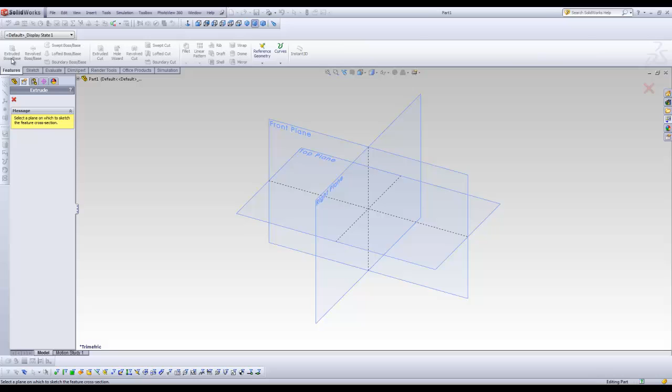We're going to start off in the extruded boss/base, and then click the front plane. This brought us into our sketch menu, where we have many entity tools such as lines, circles, arcs, and rectangles. We then have entity manipulation tools over here.

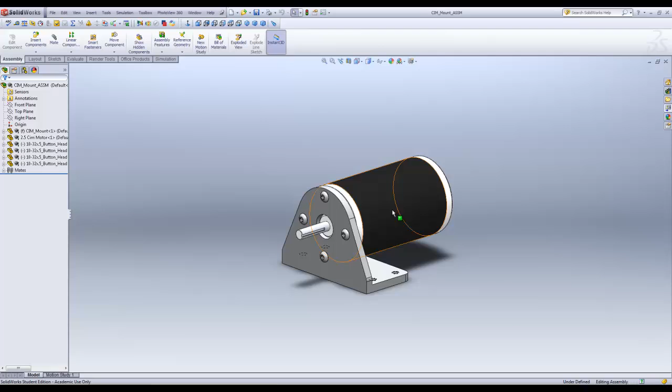We want to start off by creating the face that interacts with the motor. This feature right here is what we're going to start off with. It has a straight line that curves around the motor and then goes back to another straight line. We will then create the center hole and then the 4 motor mounting holes.

To start off, we want to create the profile of our motor. To do this, let's create a circle: click on the origin, bring your cursor back, and then click again.

We want to hit for construction. What this does is it does not include this entity in the final extrude, but we can still use it for reference. It turned it from a solid to a dashed line. Any entities with dashed lines are reference geometry.

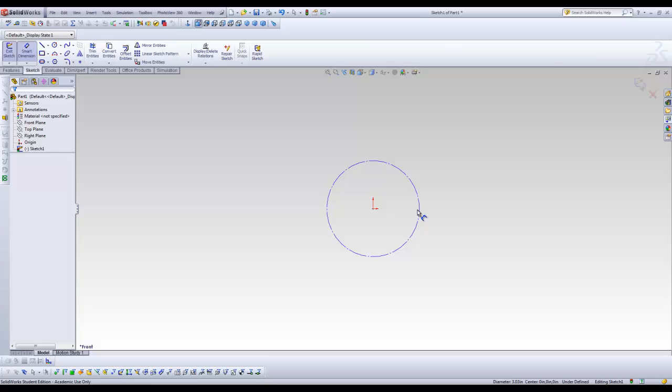We need to scale this so that it fits the profile of our motor now. We can go to our CIM datasheet and see that the maximum diameter is 2.536 inches. So now we want to hit Smart Dimension, click on the motor, click again, and hit 2.536. This created the profile of our motor, and this is what we're going to work around.

Now we want to start off with a line. Create a horizontal line underneath the motor. This will act as the base.

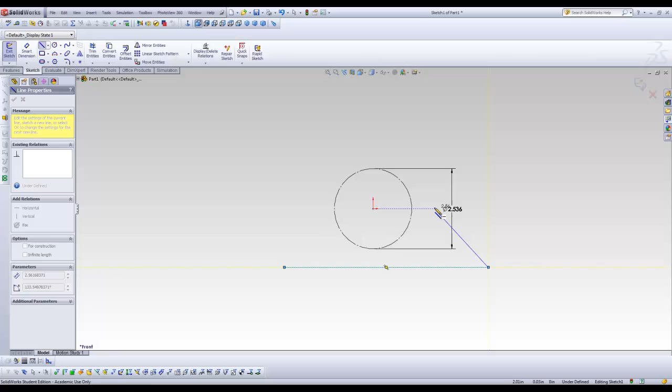We then want to bring our cursor up and make an angled line towards the motor. Notice how it wants us to create another line so we can complete the polygon. However, we do not want to do this right now. So we're going to hit Escape, then click the line again, and we're going to click this endpoint and do the same thing.

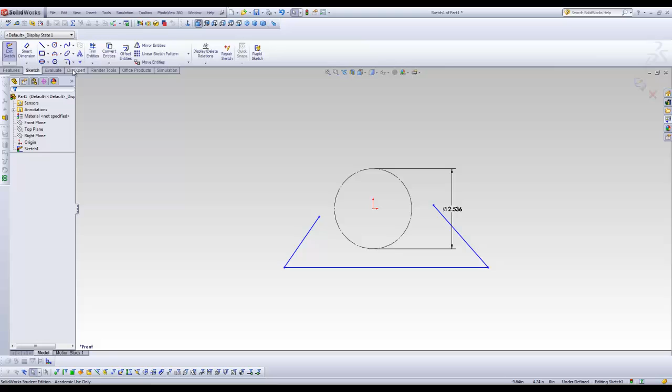Now we want to create that arc that goes around the motor. So we're going to go up to our arc tool and hit 3-point arc. I'm going to click this endpoint, then this endpoint, then click above the motor somewhere.

Now we want this arc to follow the contour of the motor. So what we're going to do is click the arc, then click the motor, and hit co-radial. What this does is it not only creates a concentric constraint, but it also makes it the same radius as the circle, so it follows the contours perfectly.

So we want to click on the arc, then click on the line, and hit tangent. What this does is it makes the line tangent to the arc, so it seamlessly flows into it. We want to replicate this on the other side.

Now what we want to do is create that profile where it goes from an angled line and then transitions into a straight vertical line. So we want to go to the line tool, click on the angled line, and then bring it straight down to the horizontal line. Hit Escape, go back to the line tool, and do the same thing.

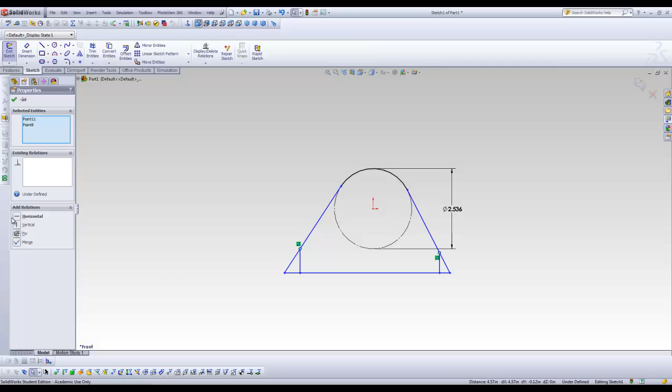Now what we want to do is select the 2 top endpoints and hit horizontal. This will create 2 lines that are perfectly the same size no matter where you drag them.

To get rid of this extra material, we can't simply just click on the line and hit delete because it will delete the whole line. We have to use another tool in SolidWorks called Trim Entities. We want to select the line, and it will just get rid of the part in between the 2 endpoints.

Now what we want to do is make it completely symmetrical to the origin. To do that, we need to right click, hit select midpoint, then hold shift and select the origin, and hit vertical. This makes it completely symmetrical.

Now we just need to refine it with some dimensions. So we're going to click Smart Dimension, click a horizontal line, and hit 4.

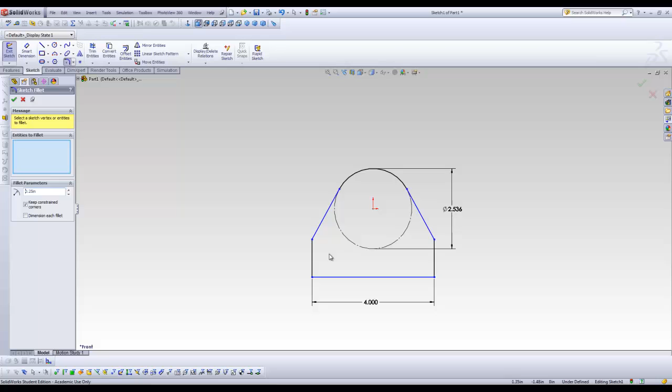Now what we want to do is create a seamless transition from the angled line to the vertical line. We're going to use a sketch fillet for that. We want to set the radius to 0.25. This will create a curve in between the two entities so that it seamlessly flows from one to the other, like so.

Go back to Smart Dimension and dimension the remaining line segment to be 0.408.

Now we want to adjust the overall height of the part. To do that, we need some more sketch geometry. So we're going to click the line tool and go from the top of the arc down to the bottom, and then hit escape, select the line, and hit for construction.

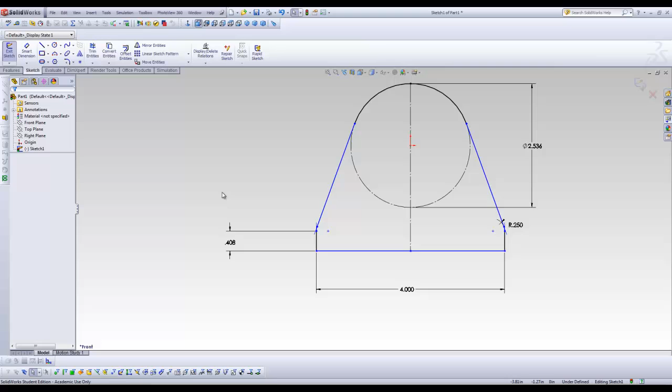Now what we want to do is go back to Smart Dimension and then dimension that line so that it is 3 inches.

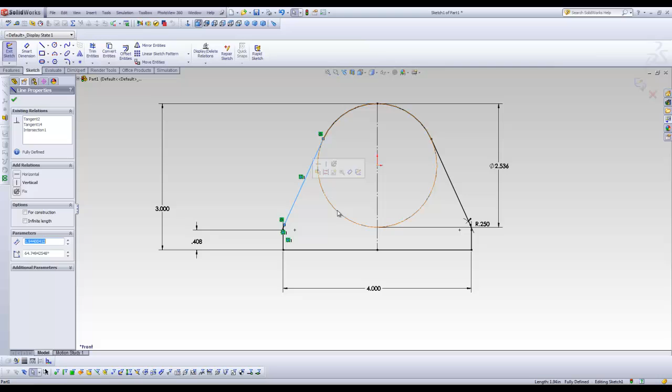As you noticed, all of the lines turned black. This means that the entire sketch is completely defined. Down here, you can see that it is fully defined. What this means is that no matter if you drag any element, it will not move. Everything has a dimension, everything is set in place.

So now we need to exit the sketch, and it'll ask us how deep we want to extrude it. We're going to go with 0.25 inches. Hit OK. Now we have a three-dimensional component.

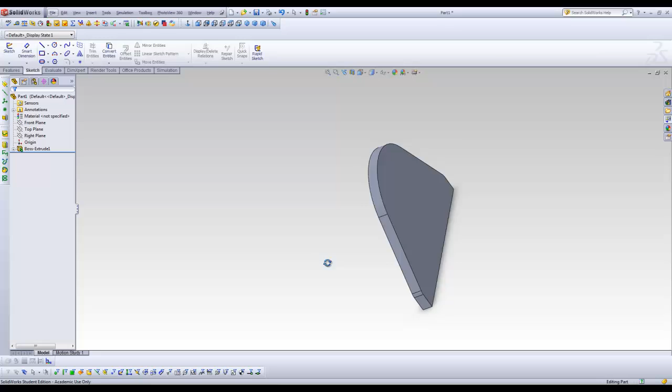To manipulate it in SolidWorks, you can hold down the middle mouse button and drag, and it will rotate around. To pan, simply do the same thing but hold Control. To zoom in, you can scroll in and out with the middle mouse wheel.

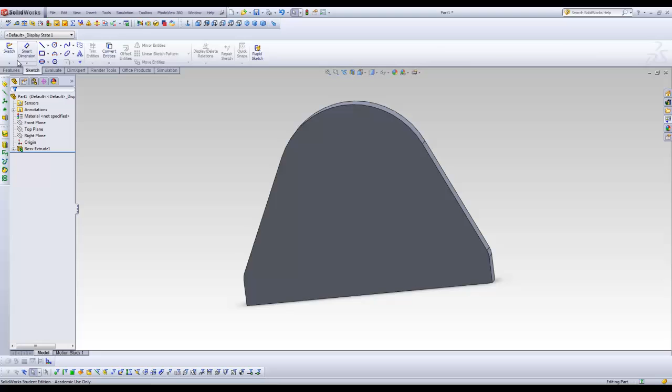Okay, now we need to create that hole in the center of our part, which allows the motor shaft through. So we want to go back to Features and hit Extruded Cut. This is the same thing as a boss extrude, except instead of adding material, we're taking material away.

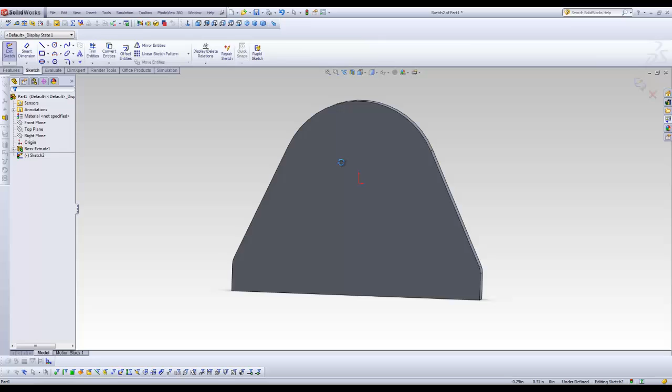Now it's asking us what plane or surface we want to do the sketch on. We want to select this surface. Instead of trying to manipulate this manually to line up our sketch, we can hit this button, the Normal To button, and it will make our camera perfectly perpendicular to the sketch. If you don't have this menu, you can right click and hit Standard Views.

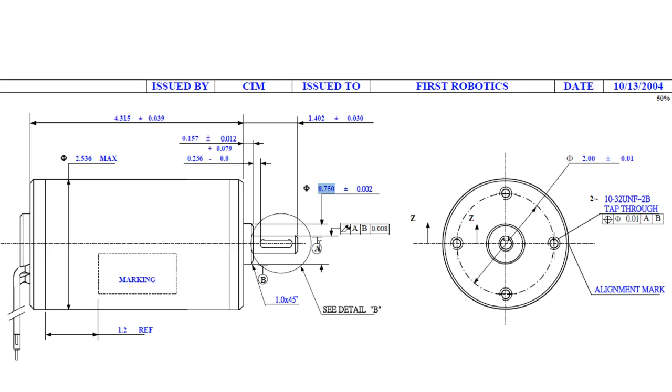Now all we need to do is do a circle around the origin. Going back to our CIM data sheet, we can see that the overall dimensions for that boss is 3/4 of an inch. So we're going to make our circle 0.8 inches in diameter.

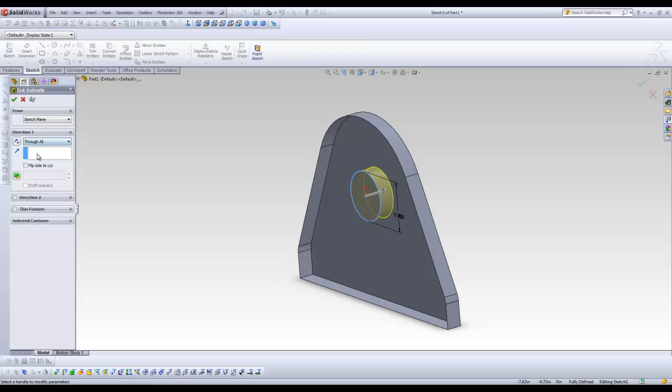Now all we have to do is exit the sketch, and just like the boss extrude, it'll ask us how deep we want to cut. Because we want it to go all the way through, we want to switch this from blind to through all, and hit OK. Now we have our center hole.

To create the motor mounting screws, we want to go back to Features and use another tool in SolidWorks called Hole Wizard. Hole Wizard is a nifty tool that has data for many different types of holes, taps, even metric and ANSI inch. So we want to go to Hole and select Screw Clearances.

Because our CIM motor uses 10-32 screws, we want to make a screw clearance hole for number 10 screws with a normal fit. We want them to go all the way through, so we're going to switch the end condition from blind to through all.

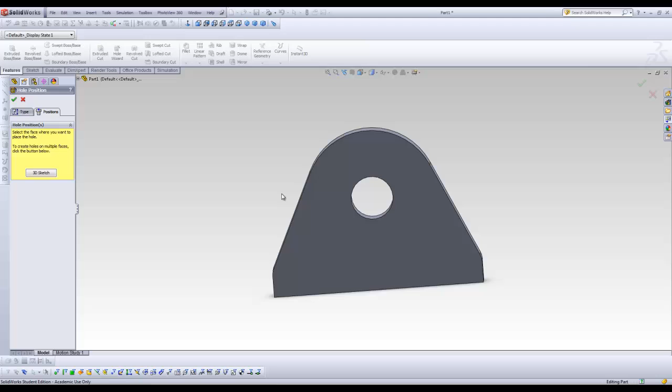When we click the Positions tab, it'll ask us which face we want to make our sketch on. So we want to select that face and hit Normal To. As you can see, it added a point, and the yellow circle around it is a preview of what the hole is going to look like.

Because our mounting holes are in a radial pattern around the center of the motor, we can simply make a circle and then position our holes around that. So let's make a circle around the origin, make it for construction, and give it a dimension of 2 inches.

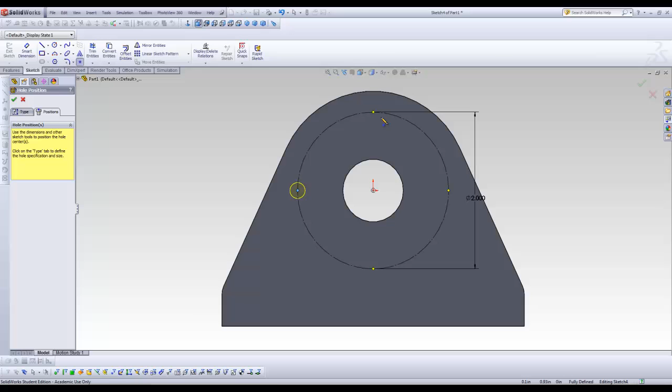I'm going to delete this point so we can add a new one in the correct spot. We're going to select our point tool, go onto the circle, and select the point directly to the left of the origin. We're going to do that all the way around. Now we have our 4 holes. We're going to hit OK. And now we have our center hole as well as 4 mounting holes.

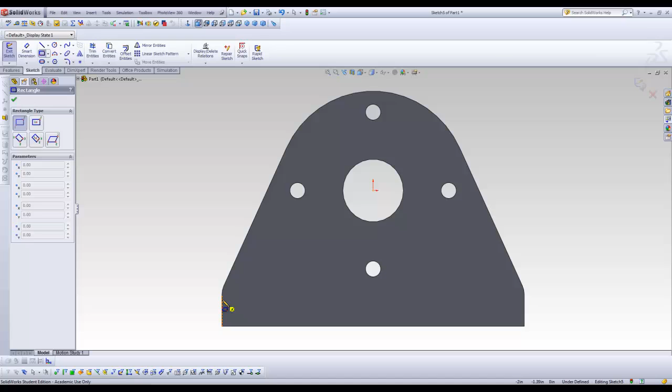So now, because this is made out of angle bar, we need to make the other half. We're going to go back to Extrude Boss/Base and select this surface, hit Normal To, and grab a rectangle. Go from one side to the bottom corner with the rectangle and give it a thickness of 0.25 inches. Now when I exit the sketch, I want to make our extrude 1.75 inches long. Hit OK, and now we have our angle bar.

Next we're going to create our mounting holes, which are 1/4-20 tapped holes. Again, we're going back to the hole wizard, but instead of a hole, we're going to do a tapped hole. We want ANSI inch, tapped hole, not bottoming tapped hole. We want to select quarter 20, and we want it to go all the way through, so select Through All again. Go back to Positions and select our surface.

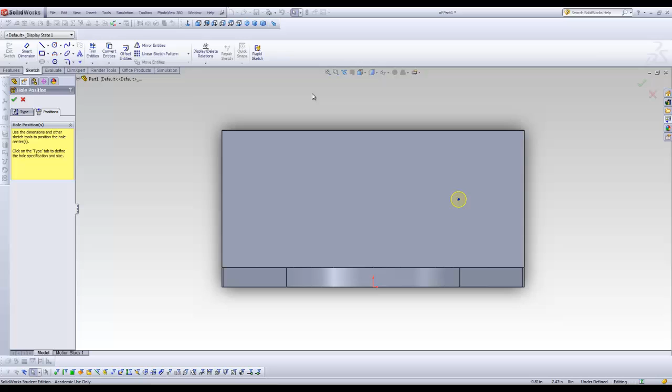Let's grab a rectangle and drag it across like so, and make it for construction. Go to Smart Dimension and make it the same width as our CIM motor diameter, so we're going to make it 2.536 inches. We want to line it up the same way we lined up our line in our other sketch, by clicking the midpoint, the origin, and hitting vertical.

Now what we want to do is make another rectangle for construction, and we're going to place a point on each corner of the rectangle. We're going to drag our point onto the corner, and it will snap to a coincident constraint. We want to do that 3 more times around the rectangle.

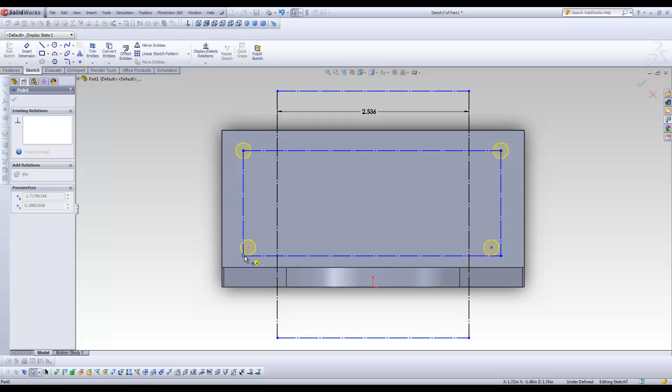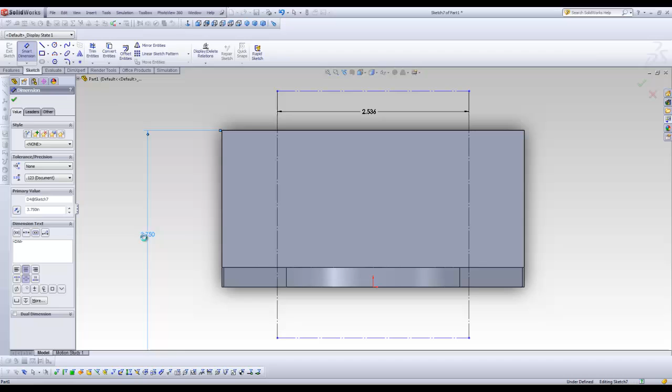Finally, we need to give it some dimensions. Let's give it a width of 1 inch, a length of 3 3/4 inches, and then we want to make it 0.375 to the end. We want to line it up with the origin as well, in the same way we did the other. So now we have 4 fully defined holes that are not going to get in the way of our motor. So I want to hit the check mark again, and we have our holes.

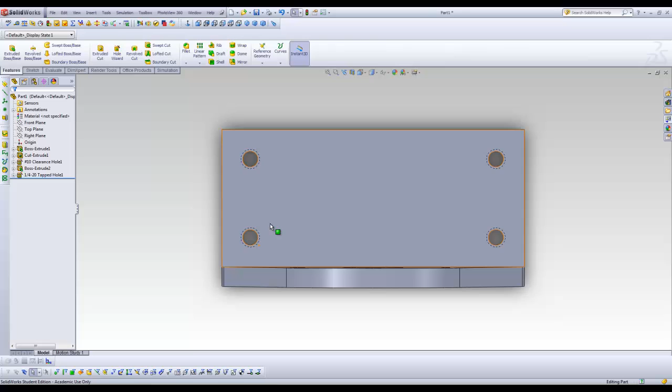The dashed line around the hole is the maximum diameter of the tap, but it only shows us where the actual hole is, and that's the size hole you will drill when you're going to tap the hole.

Finally, what we're going to do is get rid of these sharp corners by adding a fillet in the Features tab. I'm going to give it a radius of 0.25. It's essentially the same thing as we did over here with our sketch fillet, except we're able to use it in 3 dimensions. So we're going to click those 2 corners and hit OK. So now it rounded off our corners.